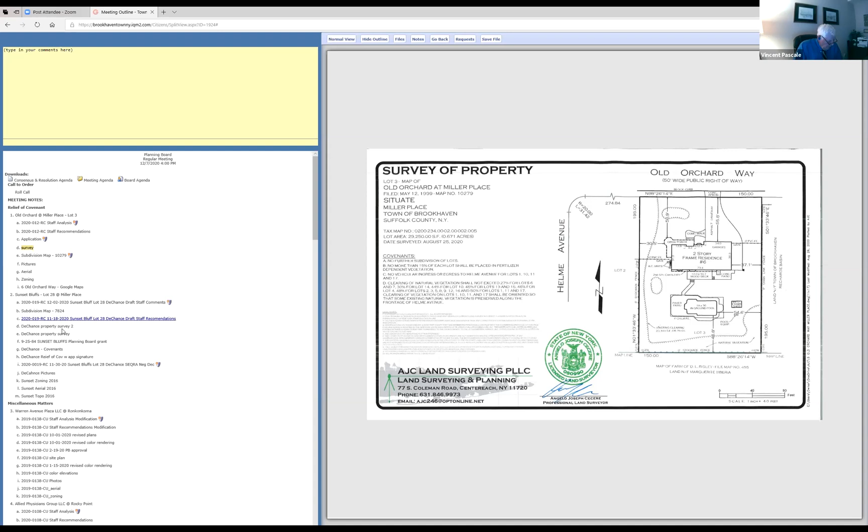Okay, item number 2, Sunset Bluffs, lot number 28 at Miller Place.

The application is located on the north side of Sunset Lane East in Miller Place, zoned A Residence 1, with a property area of 72,917 square feet. The applicant requests that the planning board relieve a covenant required for the subdivision known as Map of Sunset Bluffs, located in Miller Place.

The subdivision received final planning board approval on July 16, 1984, subject to covenants including that no lot shall be subdivided or its lot line changed at any future date unless authorized by the Brookhaven Town Planning Board. Other restrictions were also included.

Clearing and grading within each lot is limited to the amount necessary for siting and constructing a house, with the intent of preserving as much natural vegetation as possible. An area left natural and undisturbed of at least 50 feet in width shall be established along Gully Landing Road and Woodhull Landing Road.

The filed subdivision map, known as Map of Sunset Bluffs, was submitted and approved as a 28-lot single-family development with typical roadways and recharge basin, based on the A Residence zoning at the time. The area was upzoned to A Residence 1 on December 27, 1988. The map was not submitted or approved as a cluster, so no public open space was donated.

The applicant wishes to relieve the covenant for lot number 28 of the subdivision map. If the board grants this relief, the applicant would proceed with an application to the Board of Appeals to create 2 lots on lot 28. The concept plan depicts lot 1 at 31,592 square feet and lot 2 at 41,325 square feet.

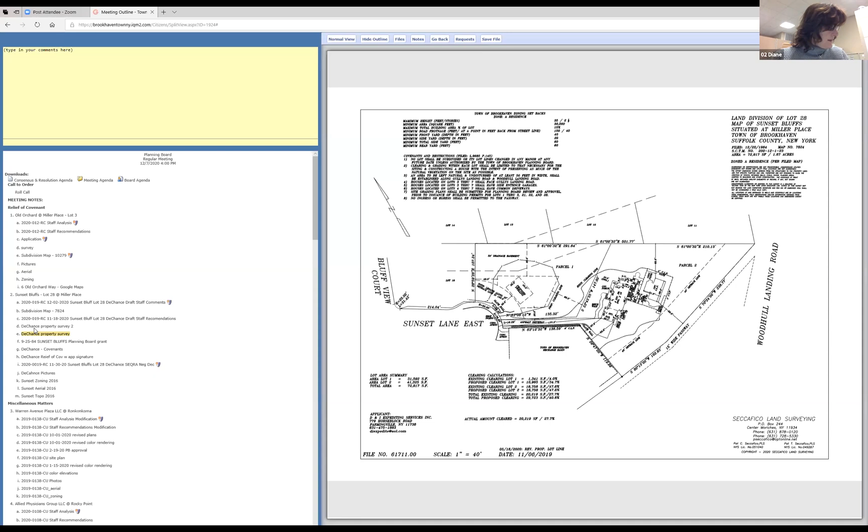Mr. Chairman, members of the board, this is a parcel located on a filed map filed in 1984. It is the largest parcel in the entire filed map, and the applicant is seeking relief of the covenant to divide the property into two parcels, one being a flag lot configuration. If you look at the original filed map, you can see several other parcels with a flag lot configuration, and that's how the map was created back in 1984.

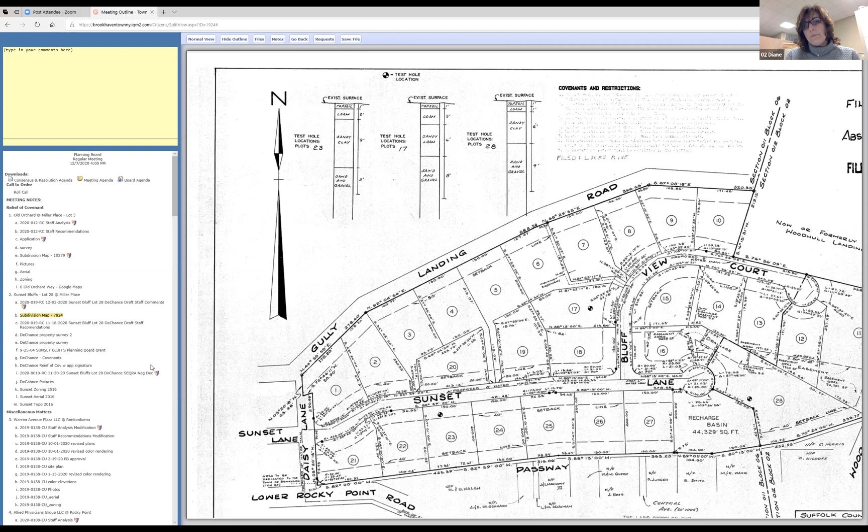I have submitted a survey to the board showing the proposed configuration for the application that would have to be made to the Zoning Board of Appeals in order to receive approval. The first step is obviously to seek permission to be relieved from the no-further-subdivision criteria in conjunction with this filed map.

In looking at the proposal for the division, lot 1 would be approximately 31,592 square feet, and parcel 2 would be 41,325 square feet. As stated, the subdivision was developed under a prior zoning, and currently the Suffolk County Department of Health requires 20,000 square feet, so it would conform with that requirement, and it would also conform with the rest of the map, as the lot size would match the zoning under which it was developed. There is an existing single-family dwelling located on the property.

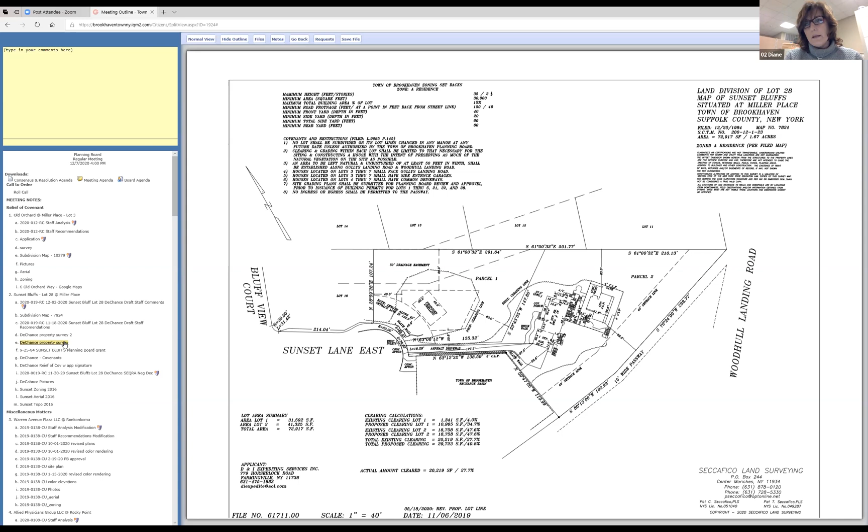As you can see, the existing home is located to the rear of the property and set back quite far, which makes it conducive to creating this additional lot in front of the existing home. If the board has any questions, I'd be happy to address them at this time.

Okay, this is a filed map, it's not a cluster in any way. Correct, it's a filed map. It was not a cluster.

Actually, at the time the map was filed, it could have been an additional lot. I can't really speak to why it was not at that time, but it certainly had enough lot area and is not unlike some of the other configurations on the overall filed map. As you look at the filed map, you'll see several lots that were deeper and larger, and they did create, I believe, at least 2 or 3 other flag lot configurations.

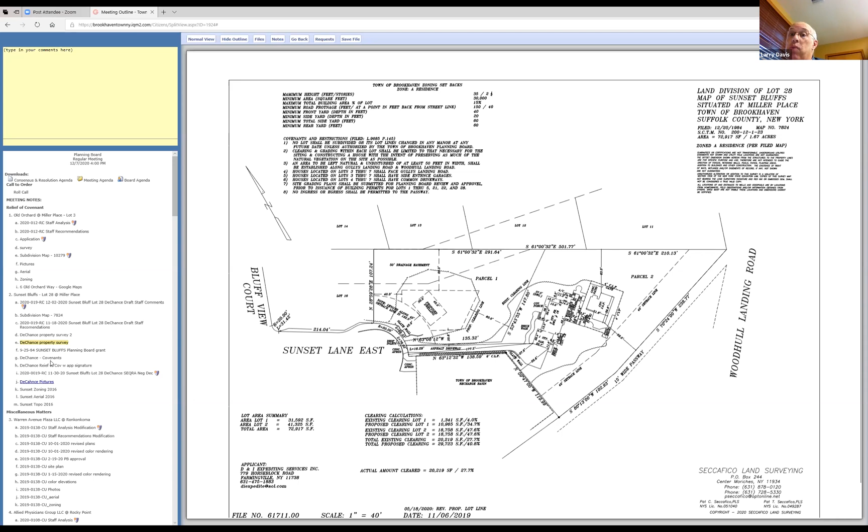This lot is on a cul-de-sac. That is not a flag lot, Mr. Chairman. There are no other flag lots in this entire subdivision. If you look at the map, there appear to be a couple of flag lots, but those are not flag lots. Those are driveways that enter the rear yards of the property that front on Gully Landing Road. Those houses were being forced to face Gully Landing Road and have the driveways come in from Sunset Lane and Bluffview Court. So if you can see them on the map, there's 4 of them all together.

Mr. Chairman, in addition, I can point out a hearing where this board actually denied an application for failure to show a change of circumstances. It was a hearing of Ashley Homes of Long Island dated November 5th, 2018, and the board voted to deny that application.

Mr. Walutis asked the applicant to show a change of circumstances—that is one of the standards. In the decision, paragraph 4 states that when evaluating a covenant relief of this nature, the board looks to see what changes in circumstances necessitate the change.

The applicant was asked at the hearing what change in circumstances would necessitate the removal of the covenants, and the only change indicated was that the home that existed at the time of the prior approval has been removed. That was particular to that case, but there has been no change of circumstances in this subdivision since it was originally built out.

Paragraph 5 further indicated that there is no evidence of any change in the environment or other elements affecting the site. By allowing this application to be approved, there will be a substantial change in the environment. That drainage easement could potentially cause problems, not just for my two clients, but for the lot that's on the corner of Sunset Lane and Bluffview Court.

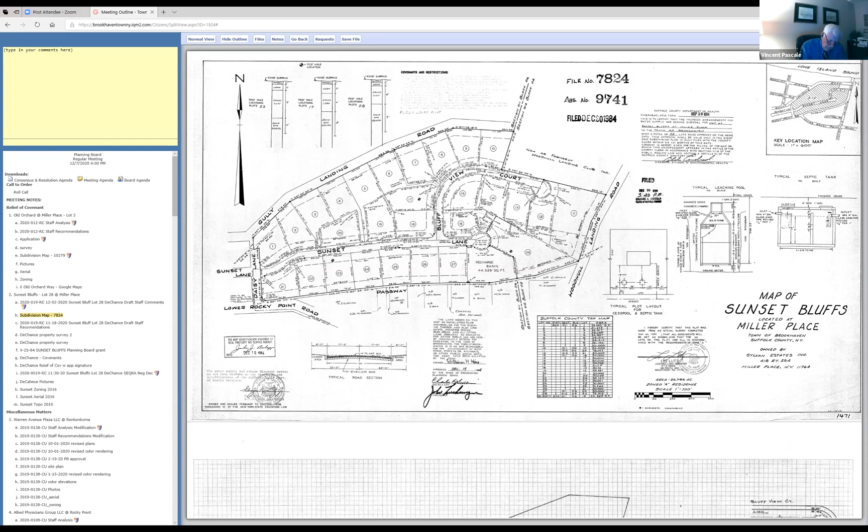Motion by Ms. Dunn to hold it open to a date certain of January 25th, 2021. Second by Richard Smith. Mr. Zarcone votes aye. Ms. Kelly, are you present? Yes, I am, excuse me. I vote aye. Mr. Walutis is not going to be with us for the rest of the meeting, so I'm going to excuse him. Mr. Smith made the second. Mr. Rose? Aye. And chair votes aye. Motion carries 6-0. Thank you, Ms. Mojay.

Thank you very much. Have a very Merry Christmas. Yes, and same to you and your family.

Item number 3, Warren Avenue Plaza LLC at Ronkonkoma. Property is located at the southwest corner of Warren Avenue and Portion Road in Ronkonkoma. Proposal is to modify a previously approved facade renovation at the existing shopping center. The facade change was previously approved by the planning board at the August 15th, 2016 hearing. No permits were issued and the application expired.

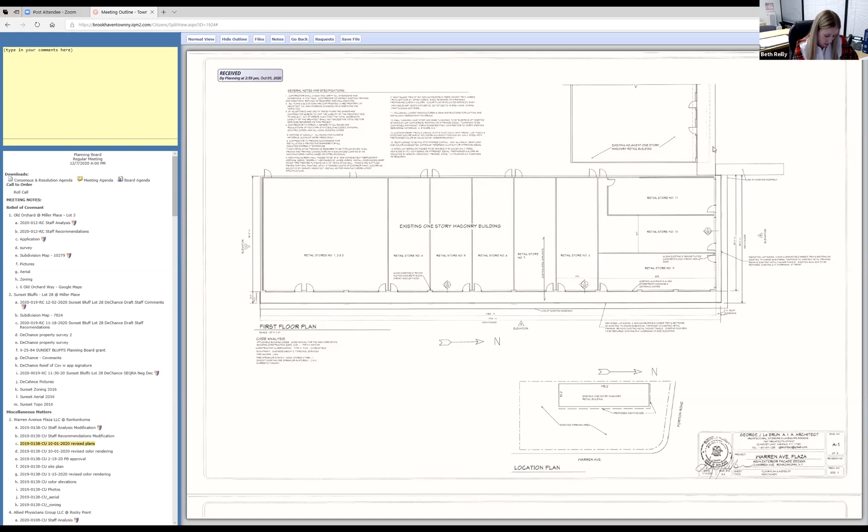The current application was approved by this board on February 10th, 2020. A color rendering was submitted at that time showing rooftop mechanical screening. A condition of the approval requested new detailed drawings matching the renderings be submitted. The owner has submitted this new detailed drawing, but it does not match what the board had previously seen in February. So I'm going to show you what we have here.

Let's see... I'll show you what was approved versus what we have. Doesn't seem right there. Here's what was submitted in January.

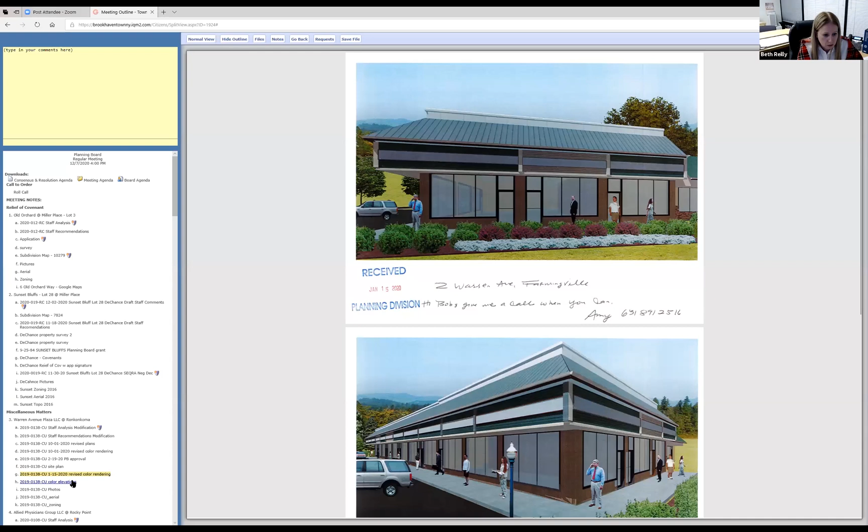Amy, you're in the meeting. Okay, thank you, sorry Lee. For some reason it wouldn't let me start my video. Oh okay, Ms. DeVito, you've been sworn in. Trying to get this stuff to come up, sorry.

So what we have here are elevations that were approved by the application presented to the board in January, and then when we asked for the detailed plans and everything, a whole different set of plans appeared. So you want to explain what's going on with this?

Yes, Mr. Chairman and members of the board and Commissioner Reilly, if you recall, we were before the board last winter, pre-COVID. At that time, we were proposing more of a mansard roof where the screening would come right off the edge of the outermost facade. I don't know if you guys recall, but we were originally trying to propose something completely different and came to the conclusion of the mansard roof because the concern was there wasn't screening for the rooftop units, which we now have proposed with the mansard roof.

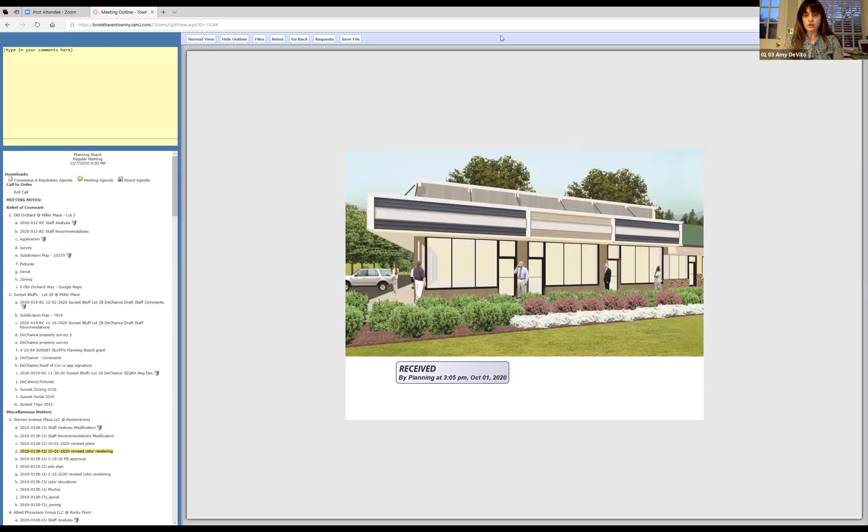As it turns out, that particular plan was turning out to be a bit of an expense for my clients to build. So they worked with their architect and came up with this secondary, or alternative, plan where we are still providing the screening, but it's being proposed by way of a built-up, Hardie-wrapped screening around the rooftop. This is much more affordable for my clients to build, so that's why we're proposing the change. We're hoping we could proceed with this so they can actually begin the work and move forward.

All right, Ms. DeVito, counselor, is anyone from the public here you want to bring in on this application? There's no one. Okay, I know the board has some questions on this application, starting with Mr. Smith.

Yes, thank you Mr. Chairman. What is the difference in cost between this latest facade proposal as opposed to the one that had the mansard roof? I don't have any written proposals, although I probably could get those for you, but I believe it was pretty substantial, to the tune of $30,000, if not more.

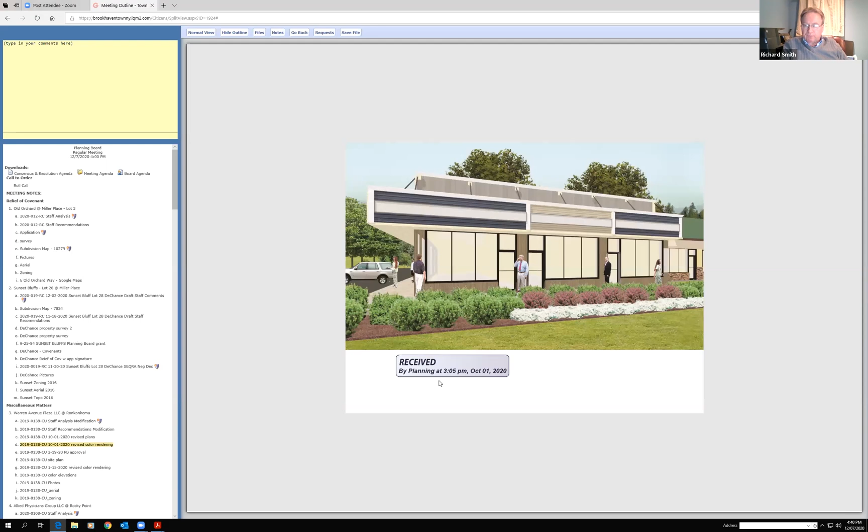With all due respect, in my opinion, we actually liked the very first one from 2016 a lot better than both of these, but as a compromise, the board and I personally were willing to accept the second one, the simplified one with the mansard roof. To be honest, I don't think this aesthetically is as nice as the one before, just my opinion. Understood. All right, Mr. Smith, any other questions by the board?

So the only determining factor here in the change in the elevations is the monetary aspect of it. Is that what you're saying, Ms. DeVito? Yes, that is the only reason driving this reapplication or resubmission of the plan. The plaza is not at full tenant capacity right now. They are trying to make improvements as we legalize tenants and hopefully bring in new ones. We do have a new tenant coming into the further end of the building, the E-Legends gaming center that had been before your board back last winter. At this point, they want to beautify the building and clean up the property to attract new tenants, but also to cosmetically improve the look of the neighborhood. But they do have to be mindful of cost, and that is the reason why we are before you today.

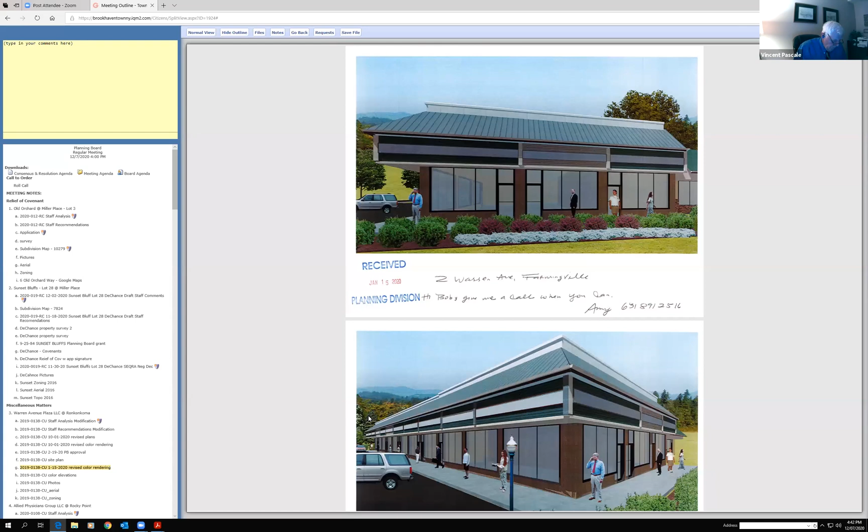Okay, any other questions by the board? Seeing none, can I have a motion? Mr. Chairman, I make a motion to close this public hearing and place the matter on the decision calendar. Motion to close by Mr. Smith, second by Karen Dunn. Mr. Zarcone, I vote aye. Ms. Kelly, I vote aye. Mr. Rose, I vote aye. Chair votes aye. Motion carries 6-0.

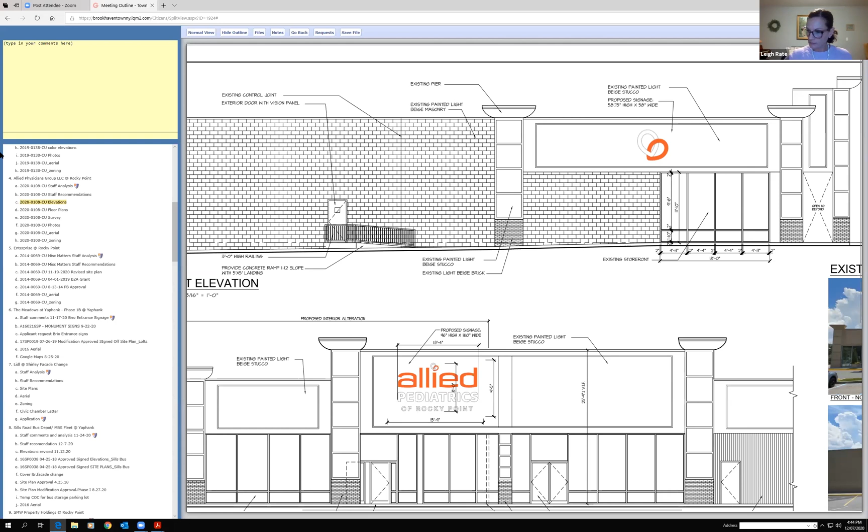Mr. Chairman, I don't seem to have anyone present for this application. Is no one actually presenting the application? No, I have no one here for this application. Oh, you know what, I'll come back to that. Maybe they're having trouble getting in. Is that okay, Counselor? That's fine. Let's come back to it because they might have some technical issues.

Let's go on to Enterprise at Rocky Point. The property is located at 534 North Country Road, Rocky Point. It's zoned J Business 2, approximately 8,520 square feet. The applicant's proposal is to remove a condition from a prior approval for a motor vehicle rental. The site was granted a planning board special permit for motor vehicle rental and variances in August 2014. Condition number 3 of the grant limited the rental vehicles to 3. The applicant came back 4 years later and requested a violation report in order to make an application to the Board of Appeals to increase the number from 3 to 13. The BZA granted an application for a maximum of 10 rental vehicles, along with the other variances required, street trees, and a hedge to be installed on North Country Road. The necessary revisions to the plan have been made, and the applicant is before the planning board to remove condition number 3 so that it reflects that they have 10 vehicles on site permitted.

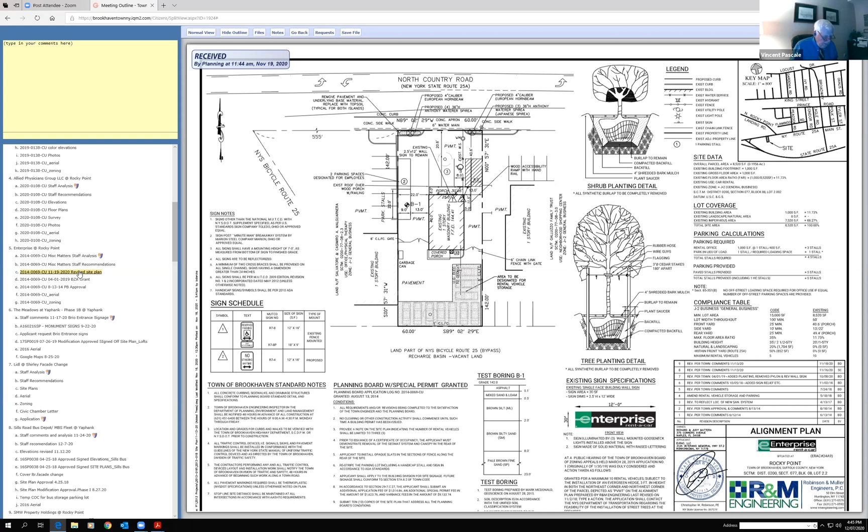Thank you, Commissioner. Do we have someone representing this application? Chris Robinson? Yes, good afternoon, Chris Robinson from Robinson and Muller Engineers. Mr. Robinson, please raise your right hand. Do you swear or affirm to tell the truth, the whole truth, and nothing but the truth, so help you God? Yes, I do.

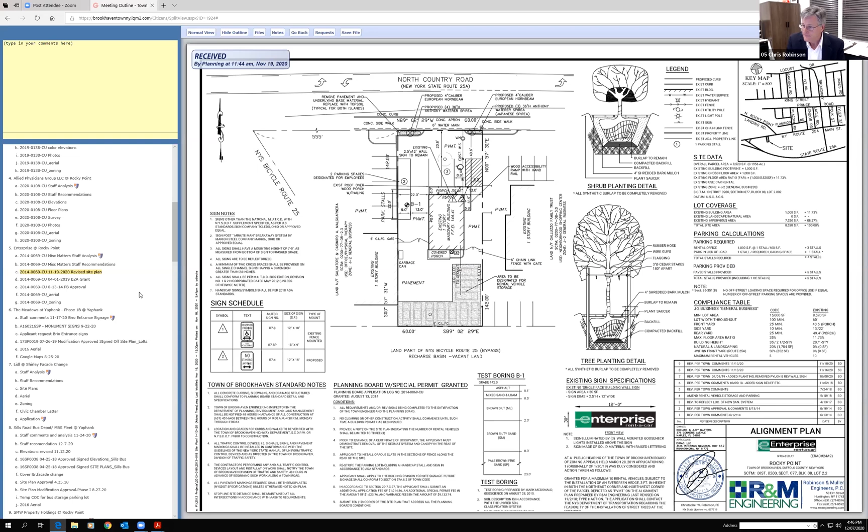Ms. Reilly explained it pretty succinctly. In 2014, we were in front of the planning board, and there was a condition placed that there be no more than 3 rental vehicles stored. Subsequent to that, we went to the Zoning Board of Appeals and received a grant to store up to 10 rental vehicles, in addition to some signage variances we had asked for at that time. We're here before you today to change that condition from no more than 3 vehicles to allow no more than 10 vehicles. Are you asking us to amend the condition or to remove the condition? I guess to remove the condition, either one would suffice. Counselor, my question is, instead of removing the condition, can we amend it to reflect no greater than 10 vehicles? I'm sorry, can you say that again? I didn't hear you. Instead of removing the condition limiting it to 3, can we just amend the condition to state no more than 10 vehicles?

Staff recommendations, there's 4 of them, up on your screen, last dated 12/4/2020. It says a maximum of 10 rental vehicles.

Okay, so they did that. All right, Mr. Robinson, is there anyone else in the public on this one, Counselor? No. Any questions by the board? No.

May I have a motion? Mr. Chairman, I make a motion to close this public hearing and place the matter on the decision calendar. Motion to close by Ms. Dunn, second by Mr. Zarcone. Ms. Kelly? I vote aye. Mr. Smith? Aye. Mr. Rose? Aye. And the chair votes aye. Motion carries 6-0.

Thank you, Mr. Robinson. Thank you very much, really appreciate it. Okay, item number 6, the Meadows at Yaphank, Phase 1B at Yaphank.

Property is located on the north side of the LIE North Service Road and the west side of William Floyd Parkway in Yaphank. The applicant requests to add entry signage to the Brio, also known as the lofts, indicating it's similar to the reserve sign previously approved by this board. Staff recommends approval of the entry signage for this application, located on the bottom right of your screen, and I cannot zoom in on it.

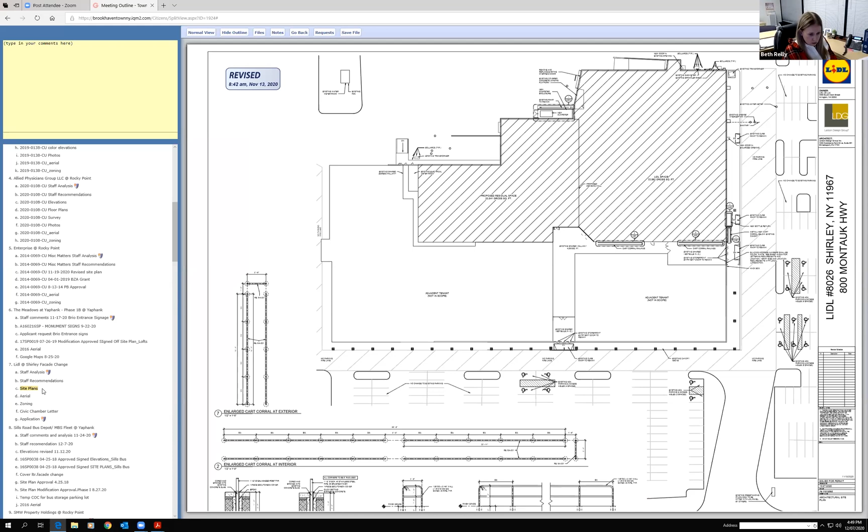Thank you, Commissioner. Is the applicant present? Yes, I have a few people in. Good evening, everybody, Christian Toma from Lidl.

Okay, can you raise your right hand, sir? You swear or affirm to tell the truth, the whole truth, and nothing but the truth, so help you God? Yes, I do. Okay, sir, you want to speak on the application? Oh, Chairman, I'm going to do it for him. Okay, raise your right hand. You swear or affirm to tell the truth, the whole truth, and nothing but the truth, so help you God? I do.

My name's Kevin Rem. I'm from Bohler with an office located at 2929 Expressway Drive North in Hauppauge, New York. Okay, Mr. Rem. We're redoing the existing Best Market that's there right now.

We're doing a full interior alteration. A portion of the space will be Lidl. The other portion right now is going to be for a future tenant, which they haven't decided yet. As far as the exterior work, we're doing new exterior wood panel finishes on the north and west elevation, just their standard Lidl package, new exterior doors, painting the exterior doors, new signage, just replacing the existing cart corrals that have been there, some exterior lighting that will comply with the town lighting code, and then installation of a new bottle redemption center with an overhead door and a new trash enclosure for them. There's currently work being done on the east end of this shopping center at this time.

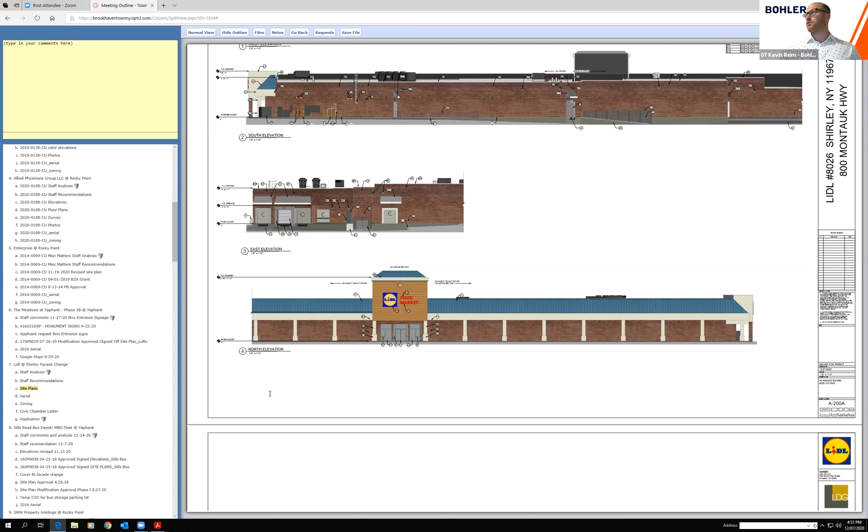All right, does that conclude your presentation? Yes, that does. Council, do we have anyone in the public on this? Lee, do we have anybody in the public? I have no one from the public. Board have any questions? No.

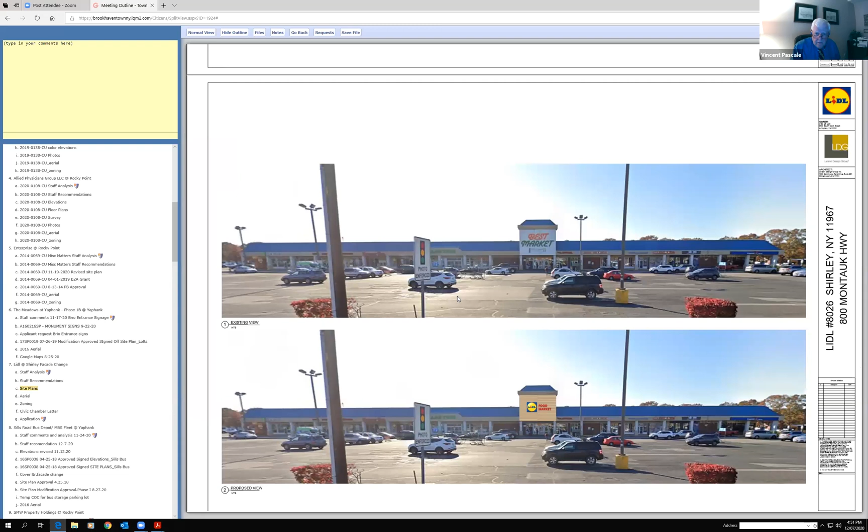Commissioner, do we have a current elevation view of this shopping center at the present time? There it is. So that's today, right.

Now the Lidl elevations, that blue rooftop, is that going to go to the very east end of the building as well, like this one, like the Best Market? It looks to me, correct me if I'm wrong, Kevin, that they're not proposing to change the roof, it's just the way it's appearing. So they're just proposing to change that box where it says Best Market, swapping it out for the wood plank and the Lidl sign.

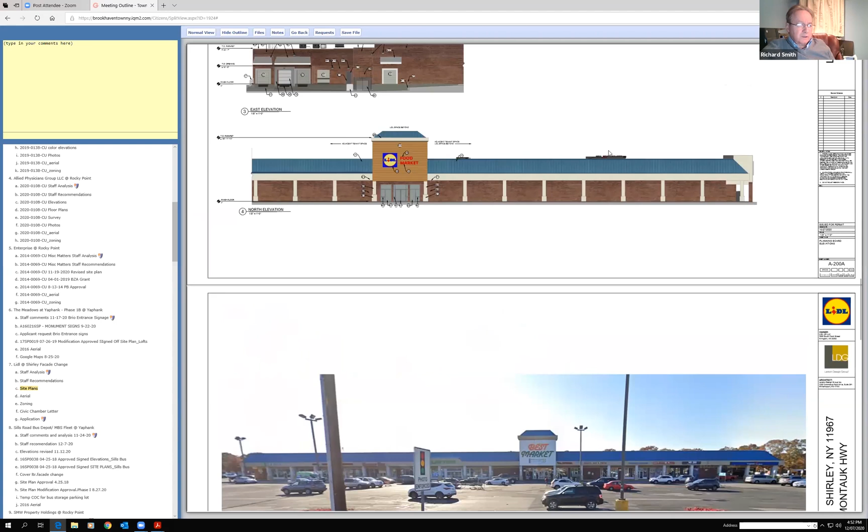Okay, any questions by the board? I do, Mr. Chairman. It looks like on that proposed elevation you've eliminated a bunch of windows. Is that true? If you look at the photographs that say Best Market, to the right of that sign there's a lot of glass, windows and doors along there, and I think to the left also. Are you taking all those windows out?

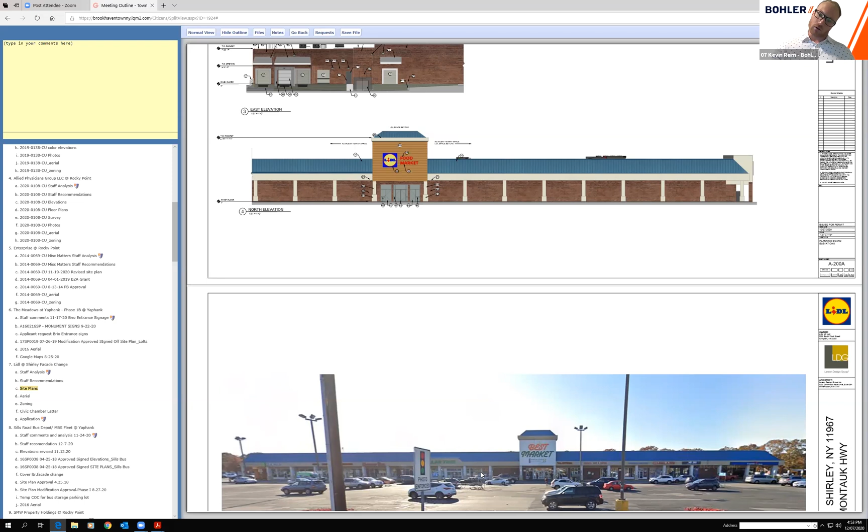No, that elevation is staying, the one that's up there now. We're looking at the north elevation, and then the one below it is the elevation facing Montauk Highway. So there's no windows being taken out there. I don't see these - I see a west, south, east, and north elevation, and none of those reflect the windows that I see in these photographs.

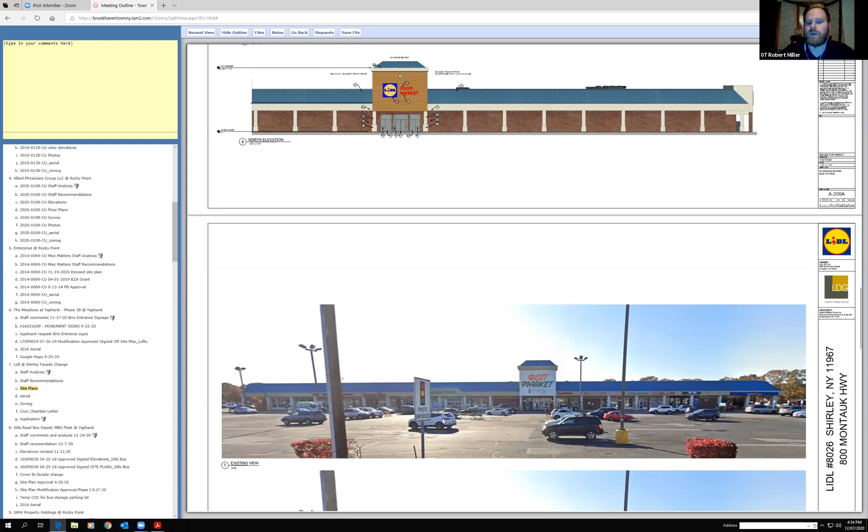Robert, are you on from Larson? Yes, I'm right here. So on that north elevation, we are keeping all the existing storefront and windows. The reason we wanted to show the expanse of that elevation is just to show that the only thing we're proposing changes to is the space above the Lidl entrance.

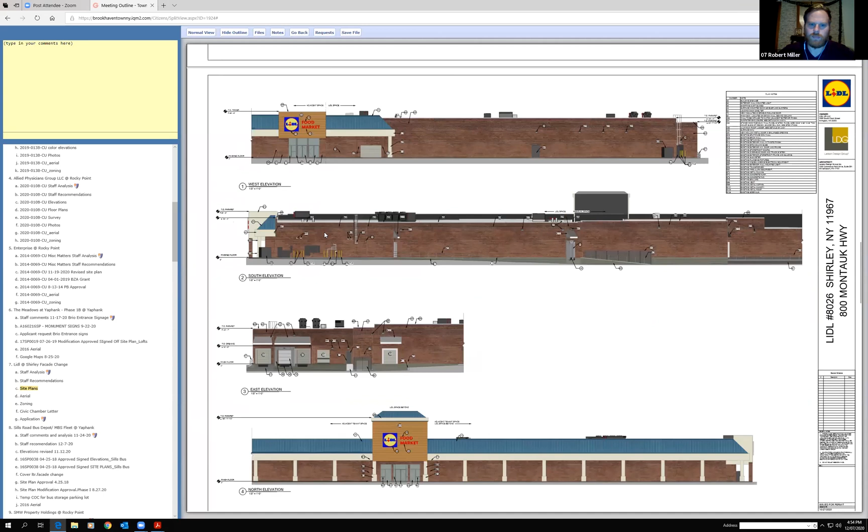Okay, so it's going to look more like that rendering - I guess the second photograph is what it's going to look like. Correct. Do you have an elevation for the west side? Because that's also an entrance to that market area. Yep, okay, I think that's what we were looking at. Is that correct, Ed?

No, Mr. Chairman, I was looking at that north elevation. In the north elevation they're proposing, it does not depict the windows. No, I agree, the north elevation is not proposing to add brick over the storefronts - they're just proposing to change the center.

Mr. Smith, you're correct, if you look at this elevation, those other windows have to do with different stores. The supermarket itself is actually to the south part of the center court or center aisle. Am I correct, Mr. Rem? Yeah, those are additional stores facing north.

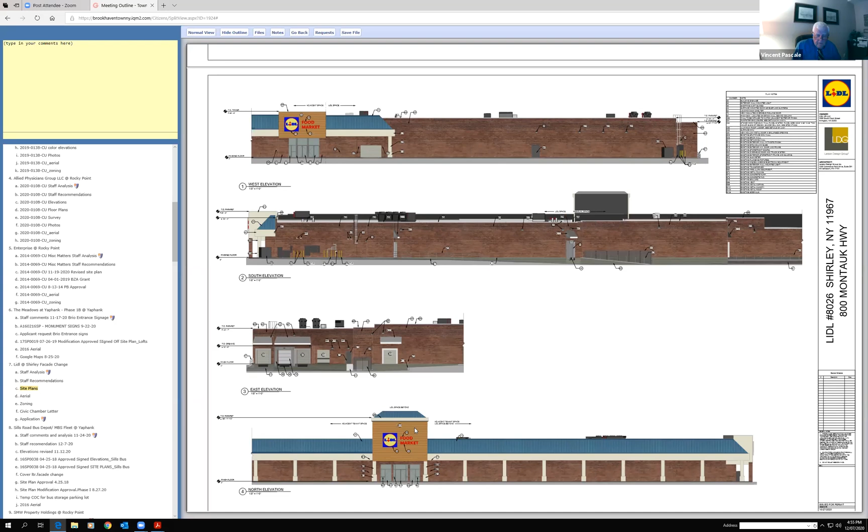It is somewhat misleading what we're looking at, I'll be honest with you. You agree with it now, Mr. Smith? Yes, I understand what he's saying, Mr. Chairman. It's going to look, if you look at the photograph with the Best Market, the new logo - the second one on the screen right there - that's exactly what it's going to look like.

Okay, that's fine. Any other questions by the board? No. Okay, may I have a motion? Mr. Chairman, I make a motion to close this public hearing and place the matter on the decision calendar. Motion by Ms. Dunn, second by Mr. Smith. Mr. Zarcone? Aye. Ms. Kelly? Aye. Mr. Rose? Aye. The chair votes aye. Motion carries 6-0.

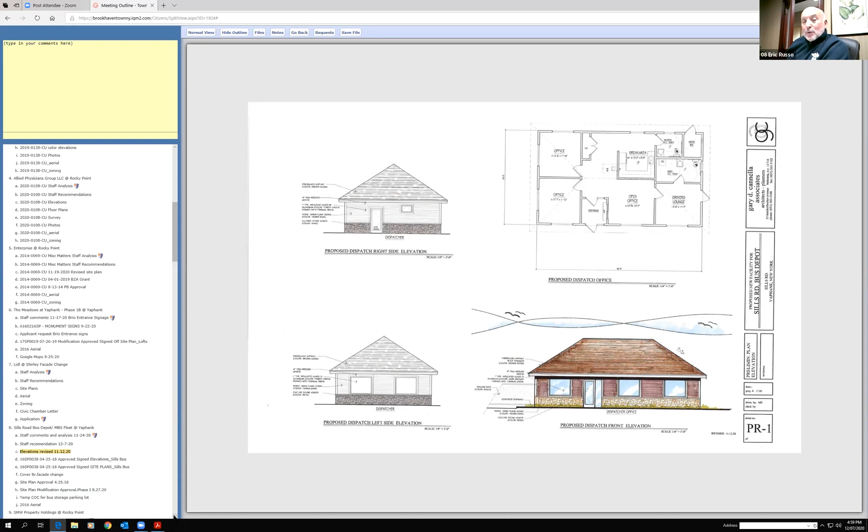Thank you, Mr. Chairman, members of the board. Have a wonderful Christmas and a happy new year. Thank you. You too, Eric. Take care.

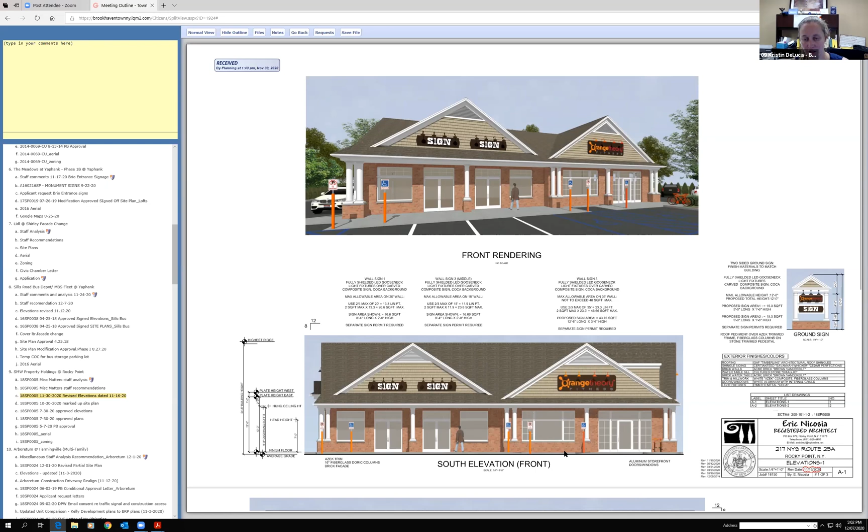The initial application was submitted prior to a tenant being in the space. Now that there is a tenant, they are coordinating their interior drawings and had requested the change for the drive-through window to work with their operations internally. In doing so, we also moved the menu board for the drive-through stacking, which is reflected on the site plans. Is this eliminating the number of cars stacking in this particular area with this application? No, nothing changes. This is just to make the internal workings of the restaurant work. Correct.

Counselor, do we have anyone else in the public that will speak on this application? No, we do not, Mr. Chairman. Board members have any questions? May I have a motion on this application?

Mr. Chairman, I make a motion to close this public hearing and place the matter on the decision calendar. Motion to close by Ms. Dunn, seconded by Mr. Smith. Mr. Zarcone, I vote aye. Ms. Kelly seconded, aye. Mr. Rose? Mr. Rose, muted, but he said aye. Chair votes aye. Motion carries 6-0.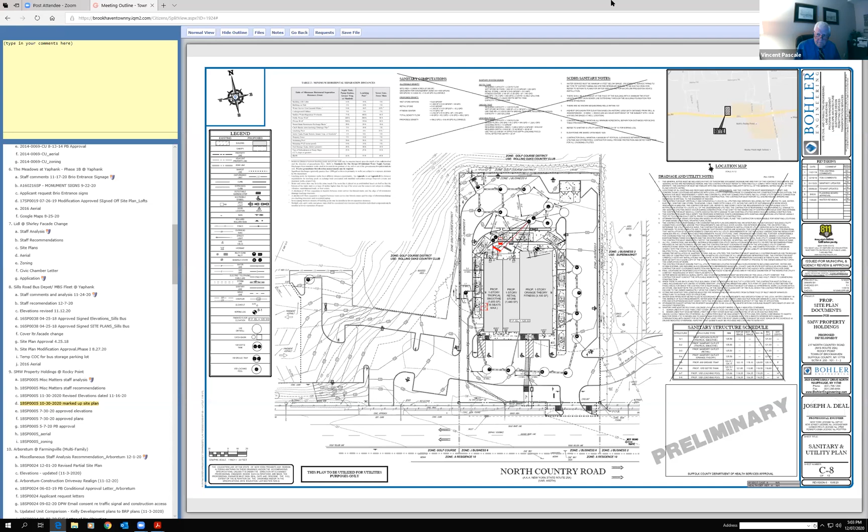You need me to redo it, or is it just the sign? Just bring everybody up to date. It's the sign. Hold on.

The applicant proposes an entry sign for the Brio, also known as the lofts. The sign they're proposing is similar to one this board previously approved for the Reserve, and staff recommends approval of this entry sign.

I'm just trying to load it up. Councilor, who do we have representing this application? Okay. Dan? All right, Tim, you're up.

Mr. Chairman, members of the board, J. Timothy Shea Jr., Certilman Balin, 100 Motor Parkway, Hauppauge, New York, for the applicant. I apologize for being late; I didn't know I was going to be doing this hearing until recently.

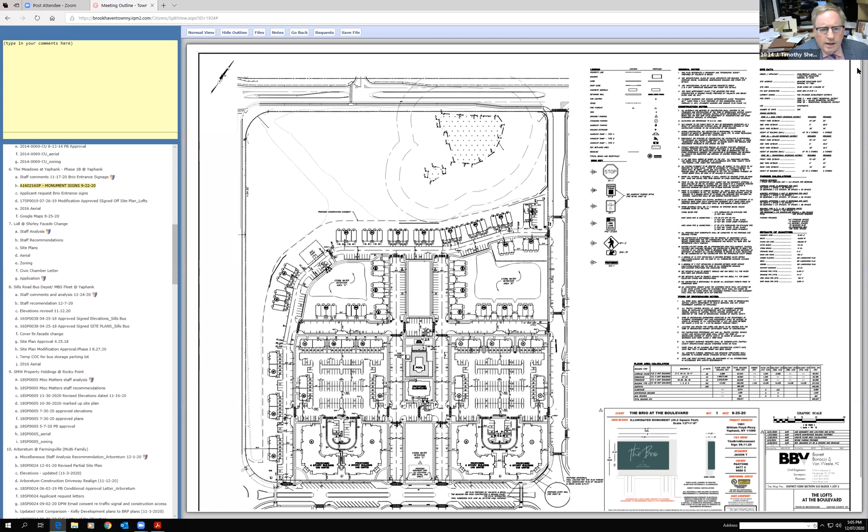My understanding is that the application before the board is merely for a monument sign to be placed outside the Brio, a residential community at the Meadows at Yaphank. The signage replicates in large part the previously approved signage for the Reserve, another residential community within the Meadows site plan. We would ask the board to approve the signage as presented.

All right, Councilor, thank you. Anyone in the public on this? Councilor Reed, we have no one. Any board members have questions? May I have a motion?

Ms. Reilly: Mr. Chairman, I make a motion to close the public hearing. Motion to close by Ms. Reilly, can I have a second? Board Member Pete Zarcone: I'll second that motion. Second by Mr. Zarcone. Ms. Dunne, aye. Mr. Smith, aye. Mr. Rose, aye. The chair votes aye.

Thank you, have a Merry Christmas, Mr. Shea, you and your family. I don't think you'll get rid of me that quickly, Mr. Pascale. Oh, don't tell me you got another one.

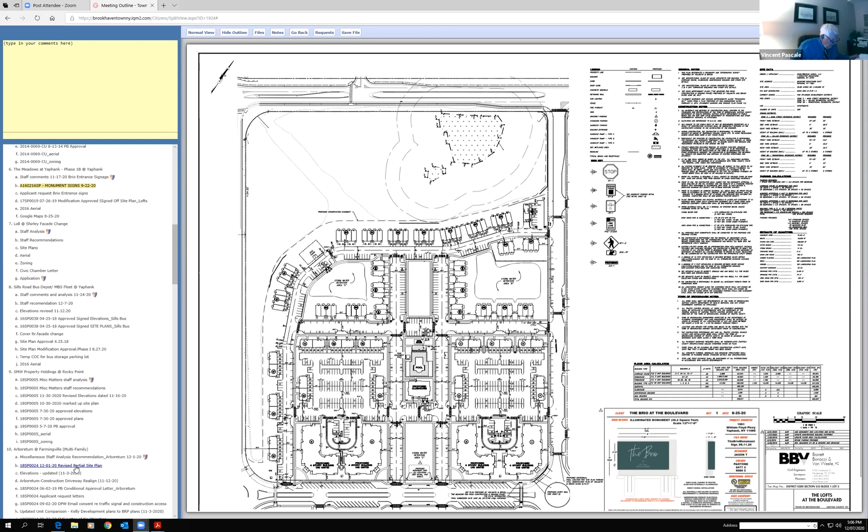No, okay. Item number 10, the Arboretum at Farmingville. The application before you is located on the south side of Horseblock Road, 219 feet west of Woodbury Road in Farmingville.

The project has several modifications requested: modification of unit types, sizes, and architecture; modification of the single-family house sizes and architecture; demolition of the existing two-story frame dwelling located within the park; proposed new construction driveway location; amending the proposed park construction phasing and timing; and as a result, updates to the site plan as needed, including alignment, grading, landscaping, SWPPP, and a new affordable unit map designation.

There are six staff recommendations, last dated 11/18/2020. Thank you, Commissioner. Counselor.

Good afternoon, Mr. Pascale. J. Timothy Shea Jr. again, Certilman Balin, 100 Motor Parkway, Hauppauge, New York, for the applicant. As Ms. Riley indicated, the application before the board is for certain modifications of the site plan.

The overall site plan remains substantially the same as previously approved by the board, with the exceptions that we've been able to reduce the amount of fill coming into the site. Thus there will be less disturbance than on the previously approved site plan, and the square footages of the residential units have been reduced. This reduction was done without reducing the number of bedrooms for each of the units.

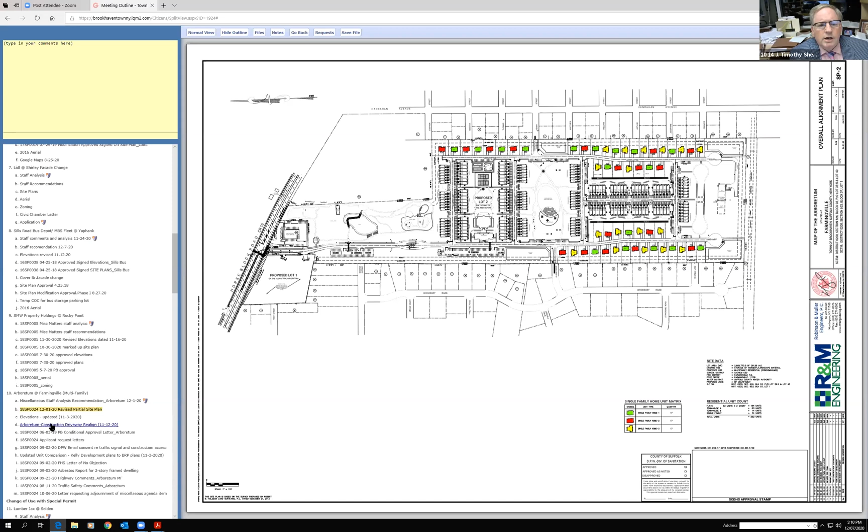So what we did was relocate the construction driveway to the east of the post office and along the easterly side of the proposed park. We worked with Mr. Wiebelt on the design of the driveway, arrived at a design which has been recommended for approval by Mr. Wiebelt, which will avoid substantial destruction of trees along the frontage and along the easterly boundary line between the proposed park area and the commercial property to the east.

So we're able to save a number of trees by actually locating that driveway in the proper place. Whatever trees are taken down will obviously be replaced as part of the landscape plan, which is part of the application.

The request for the driveway has necessitated a request for amendment of the condition for full completion of the park. The majority of the park would be completed in phase one, as previously stated. We are seeking to have the balance of the park, meaning the areas in and around the driveway area, completed by the 244th unit, and we would ask for approval of that part of the phasing plan.

What percentage does majority mean? Is it greater than 50%? Probably about 75 to 80%. It's really just the area on the easterly side where the construction vehicles will be entering and exiting, and that's really to make the site safe for the people who would be living there as construction is going on, because there are 292 units that ultimately will be constructed on this site.

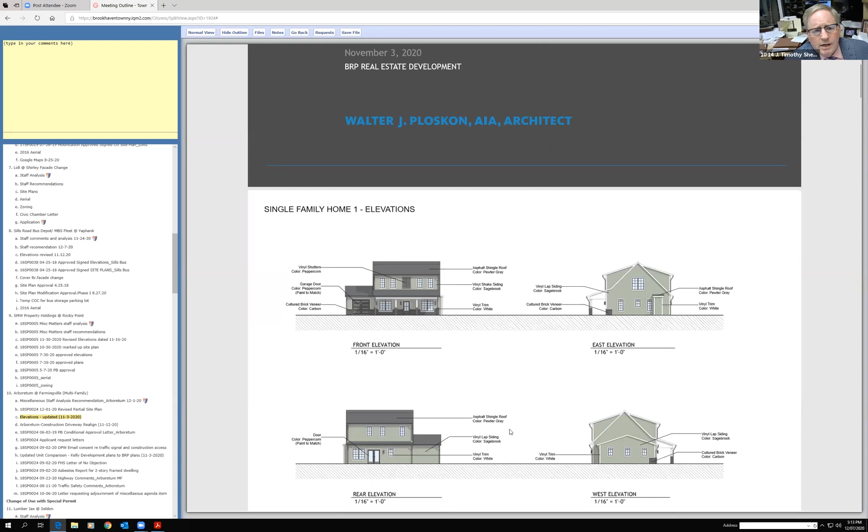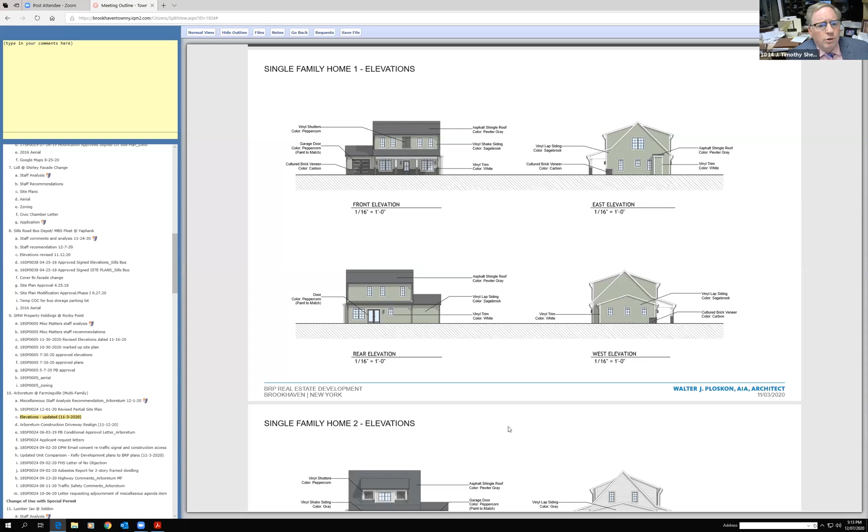Let me see if there's anything else on this. It was pointed out to us by Mr. Wiebelt in looking at the plan that we needed to add the 25-foot vegetated buffer requirement along the eastern and western sides of the property. We have incorporated that, and we will be providing additional plantings and a planting plan for those areas to insulate the neighbors to the east and the west. That was something that everybody overlooked at the time of the site plan, and Mr. Wiebelt was quick to discover that, and we're going to provide that additional planting in our landscaping plan.

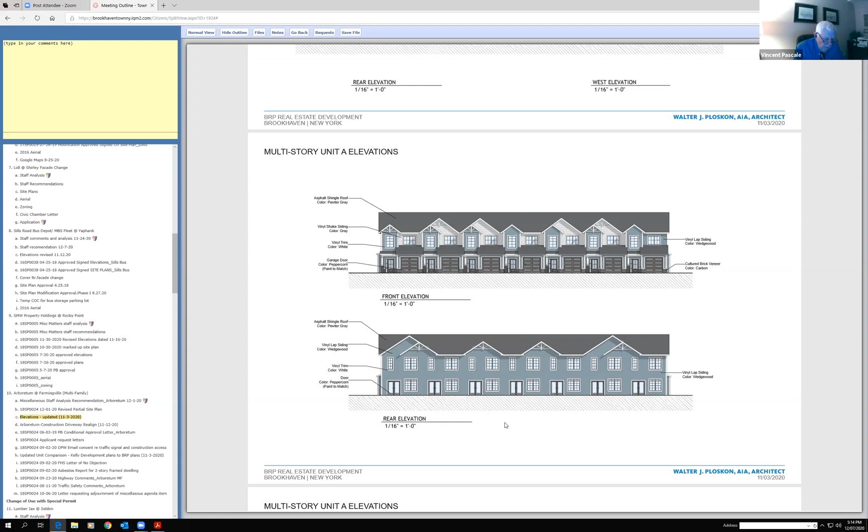I think that covers all the requests for modification of the plan. Councilor, is there anyone in the public who wishes to speak on the application? No. Okay.

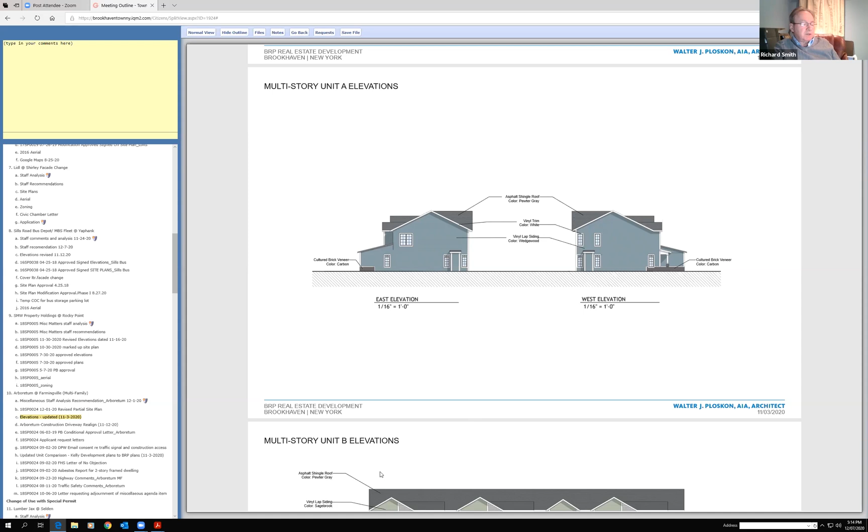Board members have any questions? I have a question, Mr. Chairman, this is Richard Smith. I see the shaded area on my screen here in my office. How is that going to help you not interfere with other things going on in phase one when that driveway actually dumps into the lower third of phase one? How does that work?

Well, phase one would be the westerly two-thirds of the park area. The driveway access would go into an area that's not phase one. Phase one is for the most part elsewhere, other than the park area. There may be some confusion with the way the phasing map lays out, because the phasing lines actually kind of bracket around certain areas. So phase one is located on the southerly side of the property, the furthest part of the property away, with certain exceptions being the east and west side with some of the single family housing.

Which are, again, on the southerly side of the property, very far away from the parkland. I think the issue is that the phasing plan, until you really take a look at it, appears to have more phase one than it does. This area where all the multifamily units are closest to the park are actually in later phases. They are not part of phase one. Just so you understand it.

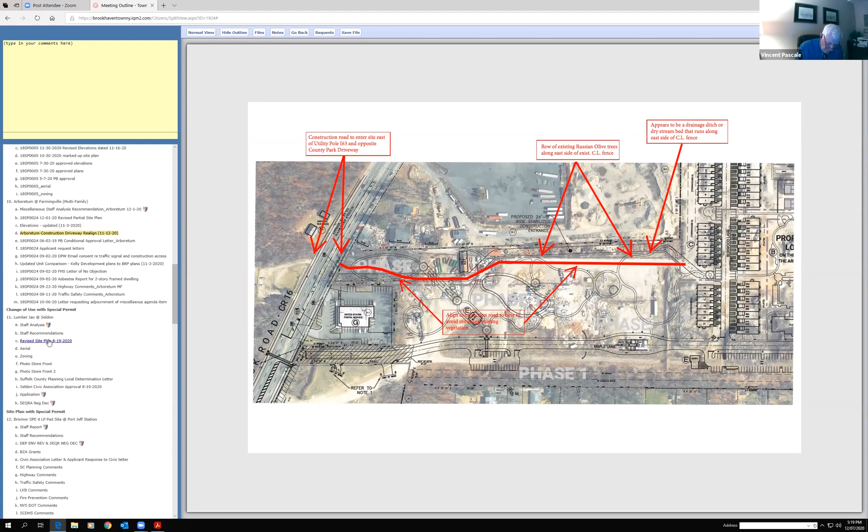Any questions by the board? No. May I have a motion? Mr. Chairman, this is Board Member Pete Zarcone, I'd like to make a motion to close this public hearing and place the matter on the decision calendar. I second that motion. Motion to close by Mr. Zarcone, second by Ms. Reilly. Ms. Dunne? Aye. Mr. Smith? Aye. Mr. Rose? Aye. Chair votes aye. Motion carries 6-0. Thank you, Councilor. Thank you, Mr. Chairman, thank you.

Item number 11, Lumber Jax at Selden. Property is located at 307 Middle Country Road in Selden. It's Zone J Business 2, and the site overall is 26.39 acres. The proposal is a change of use from 3 vacant offices to an axe throwing venue, with a special permit for assembly and social recreation hall requested. No site work is proposed, no facade is proposed. Signage will be handled by the building division at the time of building permit. Staff recommends approval, with 4 staff recommendations, last dated 10/6/2020.

Thank you, Commissioner. Counselor? Yes, I have Raymond Glynn coming in. Okay.

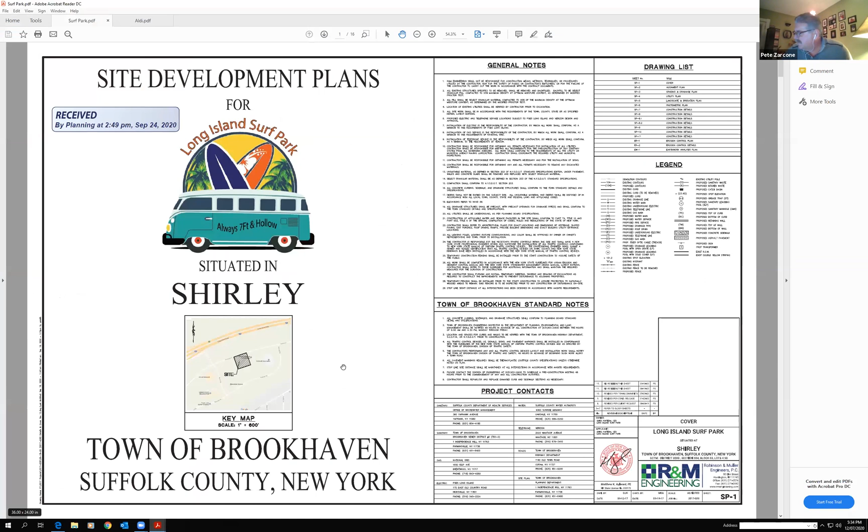Motion to close by Mr. Rose, second by Richard Smith. Mr. Zarcone, I vote aye. Ms. Reilly, aye. Ms. Dunne, aye. And chair votes aye. Motion closed.

Thank you, sir. Good luck. Thank you, everyone. Have a great holiday. You too.

You too. Item 12 is being held to January 13th. Item 13, Long Island Surf Park at Shirley.

Property is located on the south side of Precision Drive, west of Ramsey Drive in Yaphank. Property is owned by L1 Industrial, is 3.46 acres. The application before you is an amended site plan with a special use permit application of Long Island Surf Park at Shirley, which is to construct a 7,097 square foot recreation building with accessory restaurant, a 63,625 square foot outdoor recreation wave surf pool.

We're seeking an amended application to their previously approved June 17th, 2019 application. They're asking to add a new pool equipment room adjacent to the equipment bunker. The equipment bunker is being changed in elevation from 64 to 49. The wave pool configuration has been decreased from 67,511 square feet, and the depth has increased from 7.

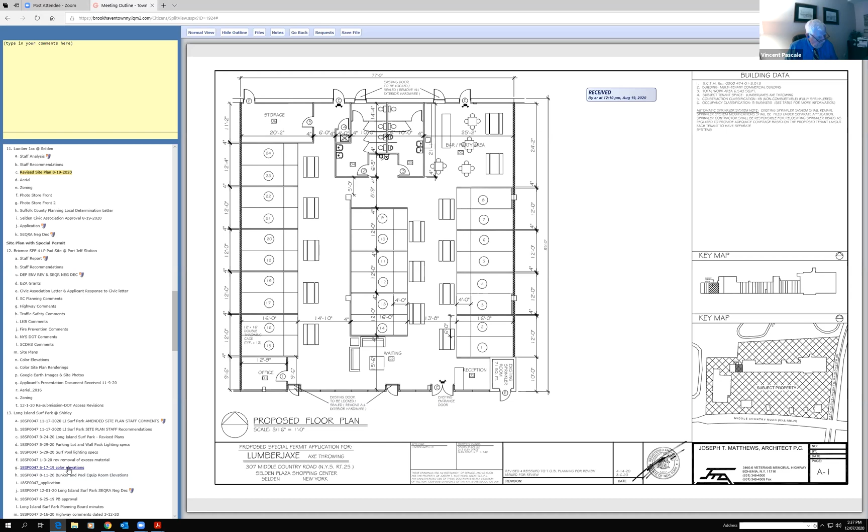Are you both part of the application? Yeah. Okay, we both, please raise your right hand. You swear or affirm to tell the truth, the whole truth, and nothing but the truth, so help you God? Yes, yes. Okay, one of you gentlemen want to speak on behalf of the application?

No, I'll speak. Good afternoon, Matthew Aylward with Robinson & Muller Engineering of Huntington, on behalf of Brett and Chris Portera. As Ms. Riley had said, there are some changes to the previously approved plan from June 2019.

Just to quickly go through them, after we received the conditional approval from the planning board in June of 2019, the design team began to fully detail the mechanical components, the surf pool filtration systems, the wave generation systems, and the power systems. During that process, it was determined that some changes in the pool depth and the geometry were needed in order to achieve the correct wave that they were going for.

It should be noted that the percentage of land clearing has not increased and that we're still complying with the compatible growth requirements.

I'll give you an outline of some of the changes. The pool filtration and mechanical equipment bunker, which is on the west side of the pool, needed to increase from 15 to 28 feet to accommodate the layout of the wave generation equipment, as well as to accommodate the filtration equipment, and just to get the water to move around as both processes were occurring.

We also added a pool pump house equipment room on the west side. That new pump house is proposed on the west side of the surf bunker. The pump house is 24 by 54 and is essentially a connected vault area that houses the circulation pumps and provides adjacent area for the water. As the waves are pushing water away, we're trying to get water into the filters, so it allows us to have a reservoir where we can keep moving the water around.

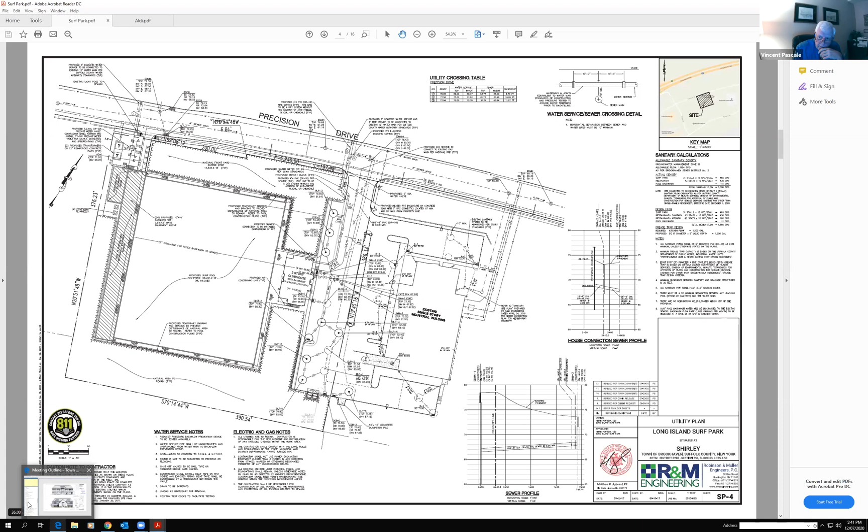Your lighting scheme, are you going to be able to provide an engineering report certification that would meet town code for dark skies? I think one of the conditions says that we will provide certification at the end, when everything is installed, that everything does comply with dark skies.

I ask because it seems like an awful lot of lighting is going to be necessary to illuminate the pool certain hours of the day. So, I'm not sure. And you have lighting fixtures that will adhere to that code?

Yes, that's why the quantity of light, the number of fixtures, varies. In some cases we have 4, in other areas we have 6. That's to get the right illumination levels.

On the original application, you said lighting was not necessary for this park. That's correct, as it evolved. They realized there was that window where they could provide additional opportunity.

And then, can you explain why there's a difference or discrepancy between what site plan is being proposed and what you have on your flyers and what you're advertising?

As far as what we see up on the screen, those are just artistic renderings. To be honest, they are relatively close, very accurate. If you look at the top picture, that's a rendering of the front of the clubhouse, which does resemble what was submitted in terms of the building elevations by the architect. The middle picture has something not exactly on our plan, like that little shed type looking thing on the left. I believe that was just the person doing the rendering, or there was some miscommunication, but that is not part of our site plan.

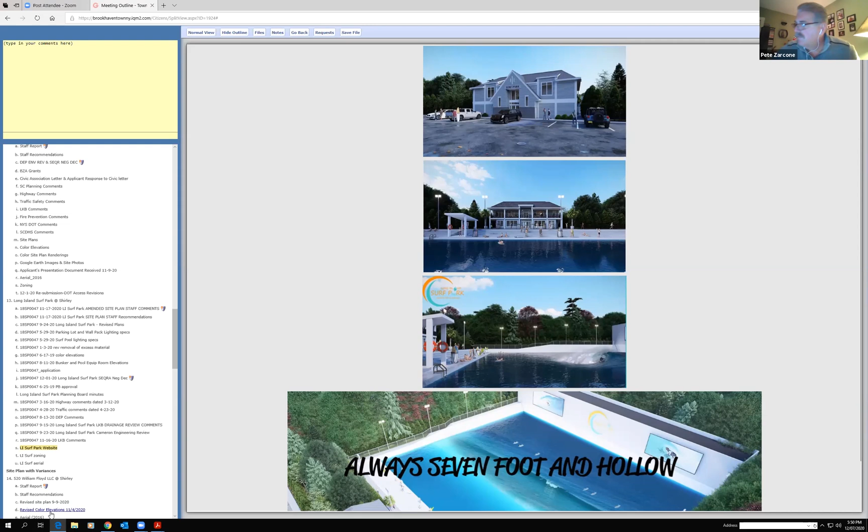I have a motion, Mr. Chairman, to close this public hearing and place the matter on the decision calendar. Motion to close made by Ms. Dunne, seconded by Mr. Smith. Mr. Zarcone, I vote aye. Ms. Reilly, thank you, I vote aye. Mr. Rose, aye. And chair votes aye. Motion carries.

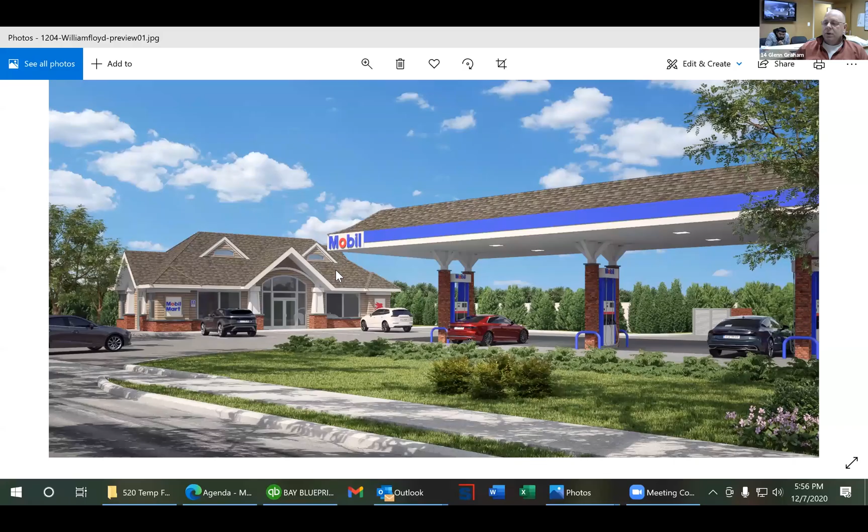All right, he should be able to. Okay, give me one sec. Yep. On a somewhat limited basis we have made changes. Oh, here we go—is everyone able to see that? This first rendering is William Floyd Parkway heading south. We have 4 pumps, 3 of which are in the screen, and then the building, as you noted Mr. Chairman, has its smaller side facing William Floyd, with the larger side facing the side street. This second rendering would be if you were coming north. From the last hearing to this hearing, we have recreated a new front facade, and also dressed up the back, so anyone coming up the side street would be able to see this. We've also removed some of the plantings from the front and the side here.

There would be street trees here and more plantings, but we felt as though to illustrate what the building would look like, we removed some of the plantings. We could keep it this way or add plantings. That's up to the board to decide.

I also wanted to show you some other locations within a mile radius of this particular site that also are narrow buildings that face their frontages on the street. This happens to be a bank.

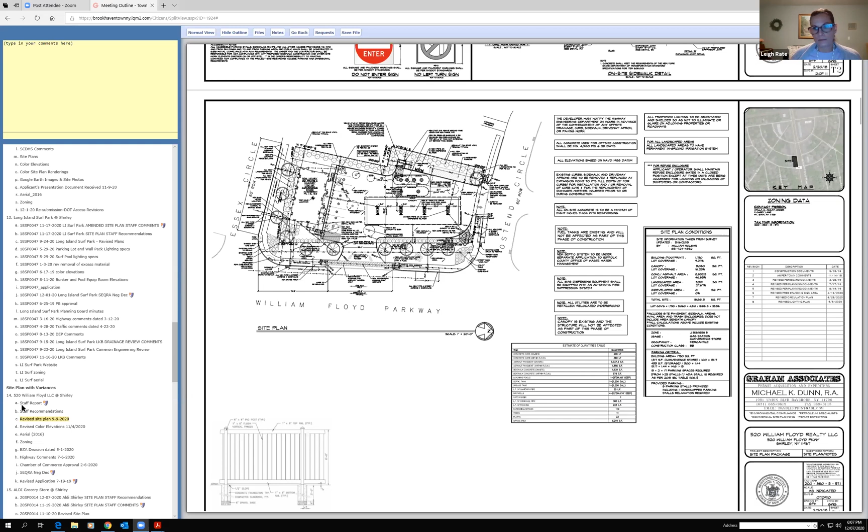Excuse me, this is Richard Smith. I have a couple of questions. Did you try doing this layout with the building facing William Floyd Parkway? Yes, in 2015 it was presented to, I believe, Mr. Panico's office. Connie Kleppert was there at the time. It was just a meeting to discuss the project in general, how we should proceed. If you'd like, I could probably find that 2015 drawing and show the board now and illustrate that. From an engineering standpoint, it really doesn't work. Why didn't it work? You just didn't have the maneuverability you were talking about?

Yeah, the depth, this is a narrow, wide lot. Unlike the Speedway across the street, which is much more square, a little bit deeper. You'll see Taco Bell probably buys some of the narrow lots, and they have a very skinny front door that nobody uses, and everybody goes in the side or through the drive-through. Well, those are generally inline buildings. Yeah, I think our rendering makes this an inline building too. It appears the narrow end, or the front, has doors and it faces William Floyd Parkway.

It would have been nice to see it. Again, we don't see it until it gets to the board, how the development worked or how it was attempted to get that building to front William Floyd Parkway. Yeah, it's a shame. We've spent four years in this process and we're just coming up to this now. It's heartbreaking for everybody involved because there's so much time invested. It's been to the town board and we thought we were very close to getting permits at this point.

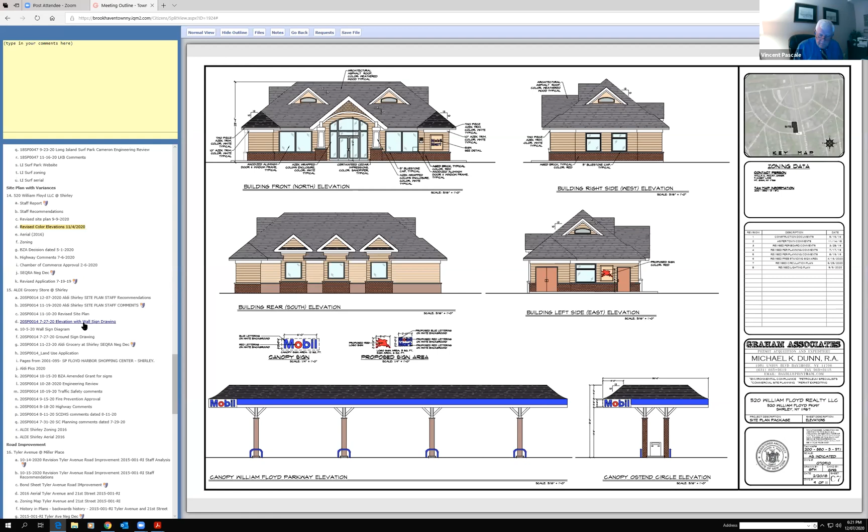Can I have a motion to hold this to a date certain of January 25th? Mr. Chairman, I make a motion to hold this matter to a date certain of January 25th, 2021. Motion to hold by Ms. Dunne, second by Richard Smith. Mr. Zarcone, I vote aye. Ms. Reilly, I vote aye. Mr. Rose, aye. And the chair votes aye. Thank you, gentlemen. Okay, thank you. Have a good night. Good night.

Item 15, Aldi Grocery Store at Shirley. Property is located on the north side of Montauk Highway, 188 feet east of William Floyd Parkway in Shirley. Parcel is zoned J Business 2 and J Business 6 and is 6.28 acres. The application is a site plan with variance application for an Aldi grocery store at Shirley, which proposes a 1,270 square foot building addition and a 1,222 square foot loading dock and facade change.

Bringing everyone in right now. And I do not have the staff comments. Just give me one second.

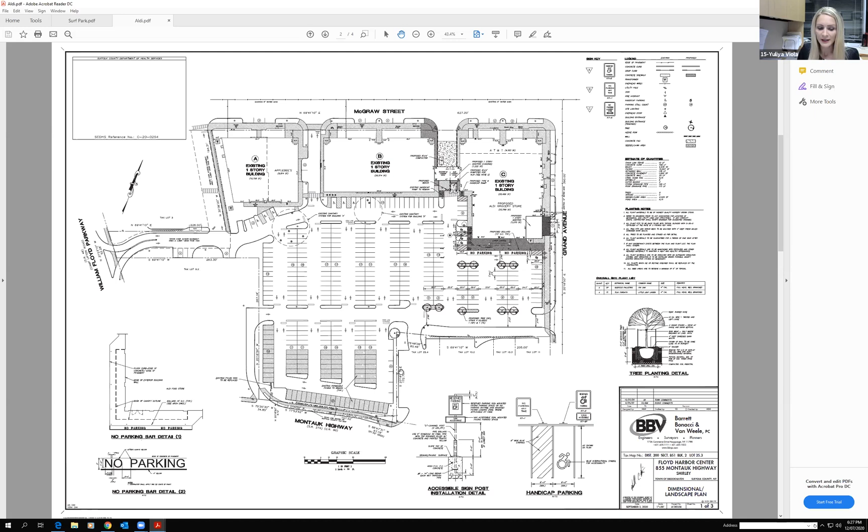We have reviewed staff recommendations and are in agreement with the proposed conditions. The only request that the applicant has for the board is to remove a comma after the word 'material' in condition number 2, so that condition number 2 is clear and means that materials of all wall signage proposed by the applicant are approved by the planning board.

Thank you. Oh, excuse me.

That concludes your presentation, Counselor? Yes, and I believe Mr. Damianis will now make his own presentation.

Okay, did you say, maybe I misheard, but did you say something about November 12th, 2020? Is that when you came from that? No, I referred to the September 23rd, 2020 BZA hearing. Oh, okay, all right.

All right, Mr. Damianis available? I'm here. Okay, please raise your right hand, sir. You swear or affirm to tell the truth, the whole truth, and nothing but the truth, so help you God? I do. Okay.

Mr. Chairman, members of the Planning Board, good evening, and thank you for hearing our application today. My name is Chris Damianos, principal of 855 Montauk Highway, LLC, the applicant. My family have continuously been commercial landlords for over 52 years in the town of Brookhaven. We currently have commercial rental properties in Stony Brook, Setauket, Port Jeff Station, Patchogue, Centereach, and now Shirley, as well as many other communities across Suffolk County. We are proud of all of our projects, and every single one of them has been successful.

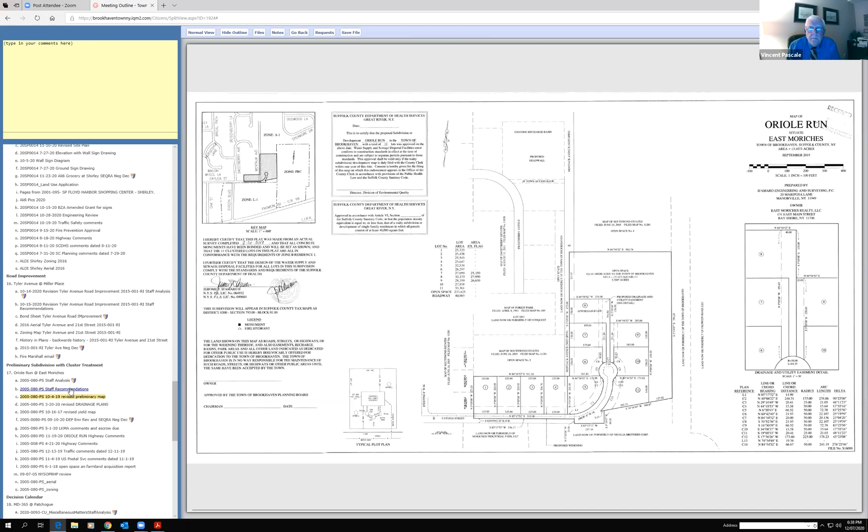I went into the conditions with Mr. Demaro, who was by my side, and I asked him about number 5, which talks about runoff and drainage, because we spent an extensive amount of time on that. In fact, over the 15 years or so we've been working on this, the drainage calculation for the Town of Brookhaven has changed and increased. But all the drainage we've calculated includes the runoff from the roof drainage and the drainage that would fall upon each individual lot. So we ask that any drainage pools for the lots be excluded from that condition. Commissioner, can you put the staff recommendations up so we can see them? That's the one about leaders and gutters to dry wells that he's referring to? That's correct.

Number 6 - I've been building for quite some time now, and this is the first I've seen this, although I can see the practicality in it. It talks about if seeding is impractical, straw mulch should be applied until favorable weather permits. I've built 500 or 600 homes over my time frame, and it's kind of difficult to get back into somebody's property to seed it afterwards. So I'd ask if there's possibly a condition instead of the straw mulch - because everybody, when they get close to finishing their home, wants to get in sooner rather than later, and the process to get the CO these days does take a little bit longer. I'd ask that in lieu of that, I could post a small cash bond just to get the CO until the time for germination is appropriate, and then upon inspection, that cash bond could be released. I was thinking somewhere in the neighborhood of $2,000 to $2,500.

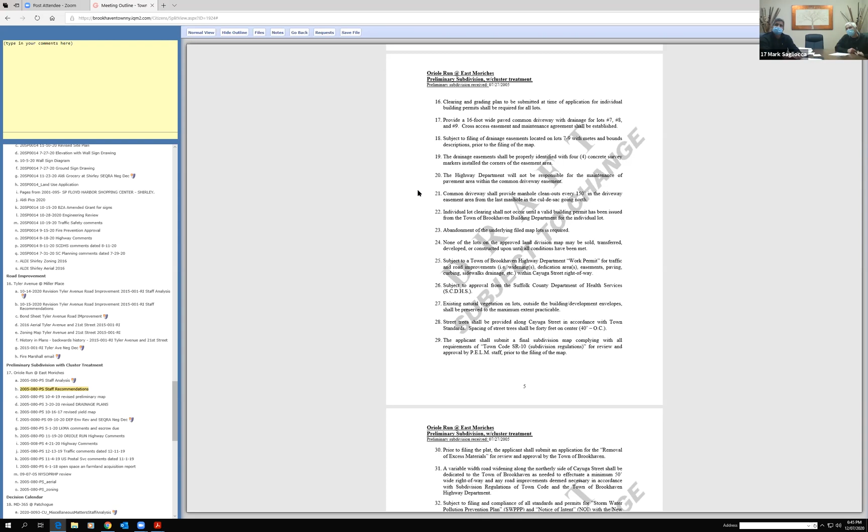So on number 22, this ties into the other questions where it says individual lot clearing. Years ago, we were able to go in and clear the road and the right of way and the individual lots. As I understand this now, we can clear the road and the right of way for utilities and putting the improvements in, but each individual lot can only get cleared under a building permit. And that building permit is subject to number 15 and number 14 that we just discussed — is that correct? Yeah, I would think so. Yes, sorry, yes, that's correct.

Okay. That's all I have, Mr. Chairman, on my questions. I would like to — I've been trying to move this along, and part of me working with the Open Space and Farmland Acquisition Advisory Board, which took probably a good year or so. I asked that they work with us moving this application along to final. So I just am requesting that from this preliminary hearing forward, that the town of Brookhaven could work a little more diligent in getting to a final approval. Okay, thank you, thank you.

Councilor, any public speakers on this application? No, Mr. Chairman. Does the board have any questions?

May I have a motion? Are we closing this? Yes. I'd like to make a motion to close this public hearing and place the matter on the decision calendar.

Motion to close by Ms. Dunne, second by Mr. Smith. Mr. Zarcone, I vote aye. Ms. Reilly, I vote aye. Mr. Rose, aye. The chair votes aye. Motion carries.

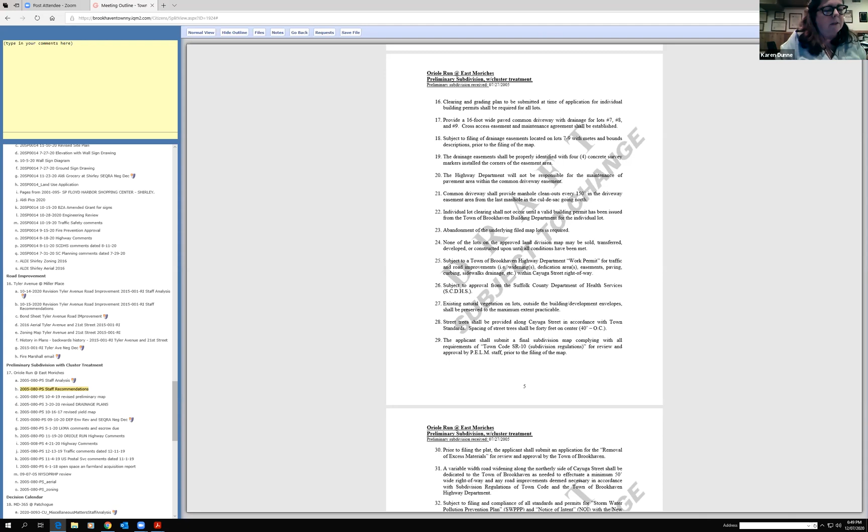Can I just question that? I thought the new recommendations were modified to the condition to not exceed 10. Is that correct, Commissioner? Yes, we removed that. It says 3 and we added 10. So okay, the staff recommendations reflect that.

Okay, so motion by Ms. Dunne, second by Mr. Smith. Mr. Zarcone, I vote aye. Ms. Reilly, I vote aye. Mr. Rose, aye. The chair votes aye, motion carries 6-0.

The Meadows at Yaphank, Phase 1B at Yaphank. Mr. Chairman, I make a motion to approve this application subject to staff recommendation, letter A, last revised December 7th, as covenants and conditions of the approval, 2020.

Motion by Ms. Reilly. Mr. Chairman, this is Board Member Pete Zarcone, I'll second that motion. Second by Mr. Zarcone. Ms. Dunne, aye. Mr. Smith, aye. Mr. Rose, aye. And the chair votes aye. Motion carries 6-0. Lidl at Shirley facade change.

On that one, I left a note for myself that the staff recommendation is that all work is supposed to be done in accordance with those elevations, and those elevations don't show windows. So do you want us to change that language, or do you want to go with it as is, understanding that you're only doing that centerpiece?

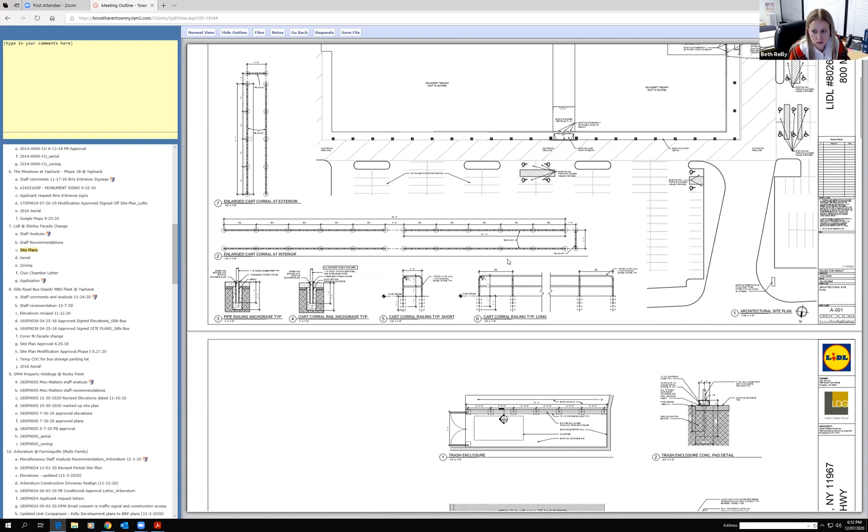Yeah, I think that north elevation, it looks like it's page 5. I think what they meant is it's not the whole thing, but I believe that elevation, and I could be wrong, is that the north elevation that we're looking at? Yes. Okay, so yeah, that's what we want it to look like.

So do you want to say page 5 of the site plan, or change that instead to all work to be done with the elevation? Or we could change it to A200B, because that's what's on the bottom of page 5 there. So why don't we just change that A to B? I think you'll be good. It looks like they took a shortcut on their elevation rendering, they're just more interested in the signage. So whose motion is this, is this yours, Karen? Yes. All right, so just change that A200A to A200B and you'll be okay.

Okay, I don't have that one in front of me, I wrote it out without that. Want me to read it into the record for you? That would be wonderful, thank you. Okay, number 1 to be changed to: all work to be in accordance with elevation A-200B, prepared by Chelsea L. Rawson, dated August 14th, 2020. That's number 1's amendment.

So with that amendment, I make a motion to approve this application for a facade change with staff recommendations 1 through 8, with the amendment just read into the record, last revised 11/24/20, as covenants and conditions of the approval. Motion by Ms. Dunne, second by Mr. Smith. Mr. Zarcone, aye. Ms. Reilly, aye. Mr. Rose, aye. Chair votes aye.

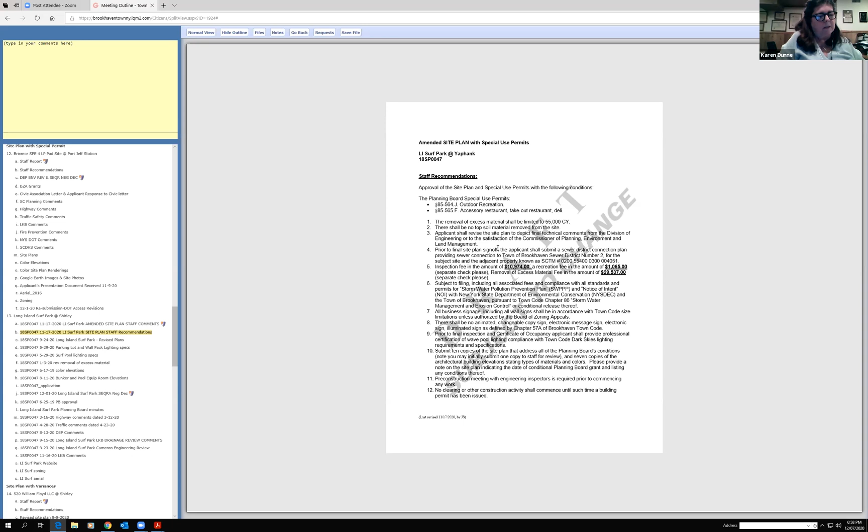Motion by Ms. Dunne, second by Mr. Smith. Mr. Zarcone, I vote aye. Ms. Reilly, I vote aye. Mr. Rose, aye. Chair votes aye. Motion carries. Item 14 to be held on January 25th, 2021.

Item 15, Aldi Grocery Store, Shirley.

Mr. Chairman, I make a motion for a negative declaration. Motion by Ms. Dunne, second by Mr. Smith. Mr. Zarcone, I vote aye. Ms. Reilly, I vote aye. Mr. Rose, aye. Chair votes aye. Motion carries.

I make a further motion to approve this site plan with facade changes and 11 variances as listed, with staff recommendations 1 through 8, last dated 12/7/20, as covenants and conditions of the approval.

Motion by Ms. Dunne, second by Mr. Smith. Mr. Zarcone, I vote aye. Ms. Reilly, I vote aye. Mr. Rose, aye. The chair votes aye. Motion carries 6-0. Tyler Avenue is withdrawn.

Oriole Run at East Moriches, item number 17. Mr. Chairman, I make a motion for a negative declaration. Motion by Ms. Dunne, second by Mr. Smith. Mr. Zarcone, I vote aye. Ms. Reilly, I vote aye. Mr. Rose, aye. Chair votes aye, motion carries 6-0.

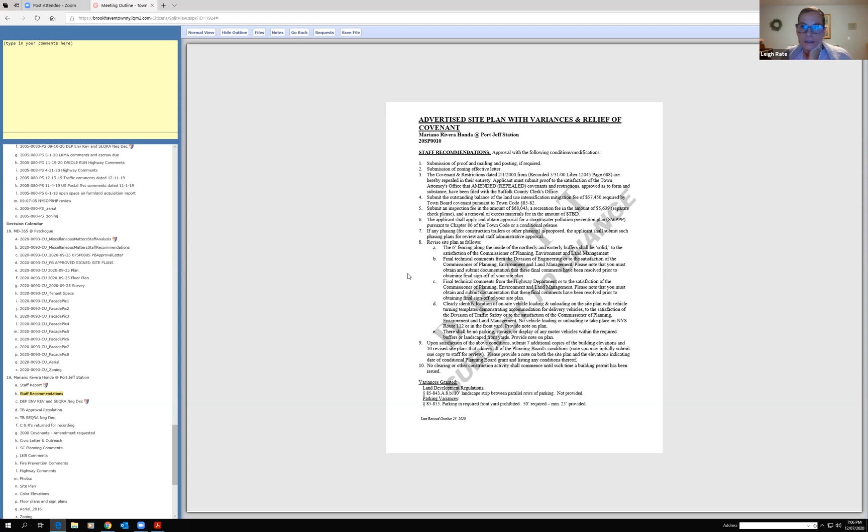I want to get it right the first time. This is actually a pretty small building compared to what we usually see, only about 1,700 square feet. My concern was the building that was there originally was about 1,500 to 1,600 square feet. Yeah, that's all that fits. And it faced the highway. Well, granted, it only had two pumps, no canopy and none of the other glitzy stuff they do today. So it's probably better to have him meet with us and with staff than keep going back and forth before the board. That's why I asked for the 25th, so there's sufficient time.

All right, anything anybody wants to add? I'm just wondering, where are we going for our Christmas dinner? Oh, that's right, not this year. Sorry, we're going axe throwing. We're going where? Axe throwing.